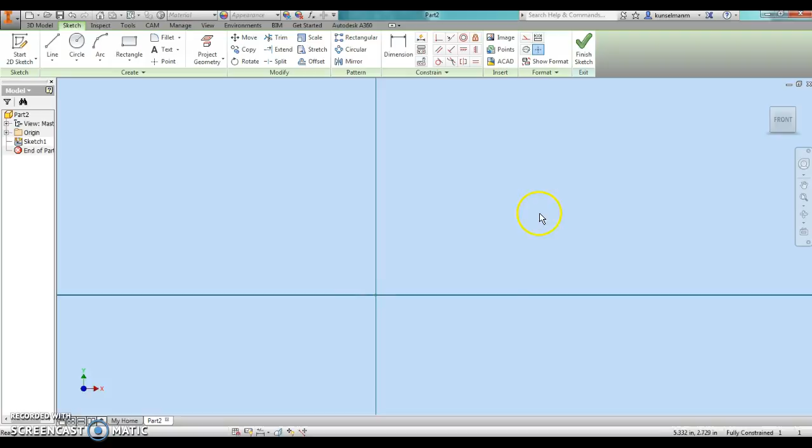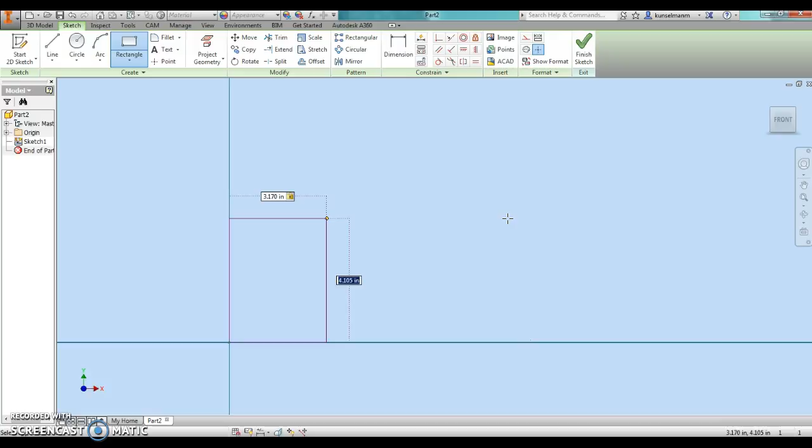Alright, so we're going to start with the passenger section of the Automoblox car. First thing I'm going to do is go to a new sketch, and I'm going to choose a plane. Okay, I'm going to start this by creating a rectangle, 2-point rectangle. I'll start with an anchor at the origin and move my mouse out, get this started in the shape I want. So this rectangle is going to be 3.17 wide and 1.53 tall. Okay, so there's the start of that passenger section.

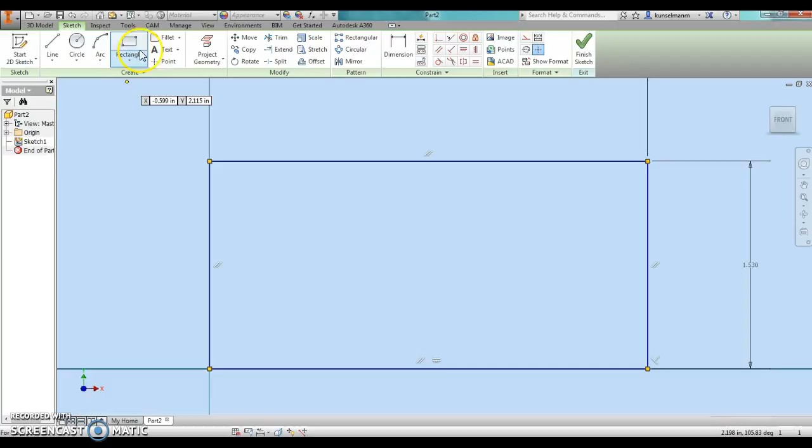I'm going to go ahead and add 2D fillets on this just to extrude it that much faster. We're always trying to get as few parts and as few sketches and extrusions over in our project browser as possible. So I'm going to click fillet, and this fillet on the outside has a radius of 0.3. So I'm going to click this line and that line, this line and that line, and all the way around.

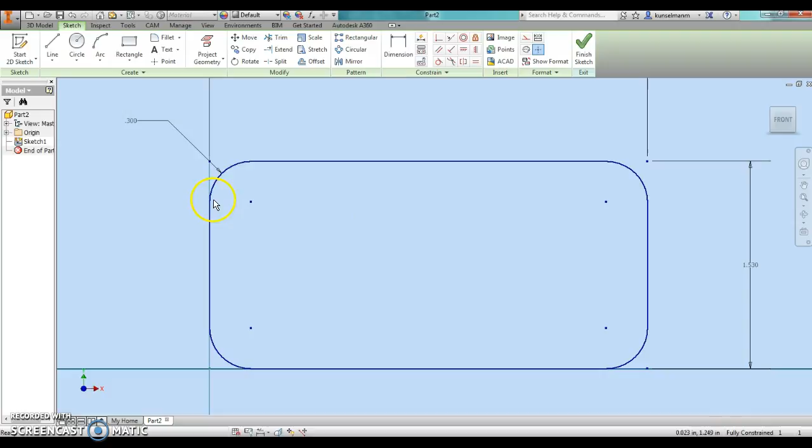Okay? The next thing I'm going to do is add in these little grooves. So little grooves will go along the side. And again, it's just one less step to do it right now. These grooves will start right at the center of those arcs. So I can just go over here, and when I get that snap, I'm going to come over, and these go in 0.06 of an inch, and they're actually 0.06 square. So 0.06, 0.06, and back 0.06.

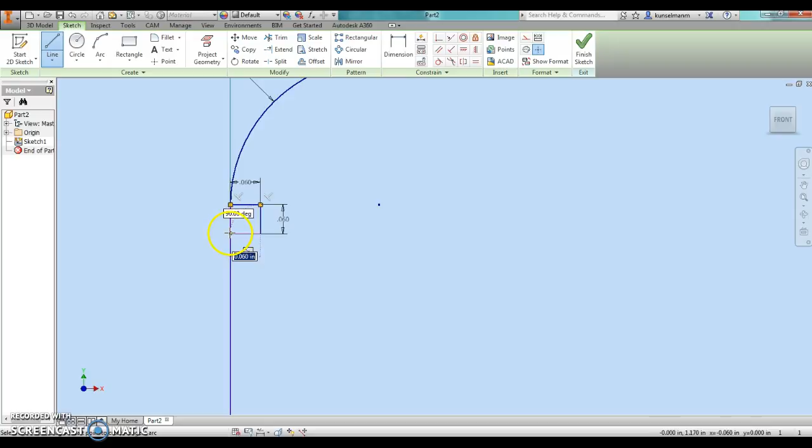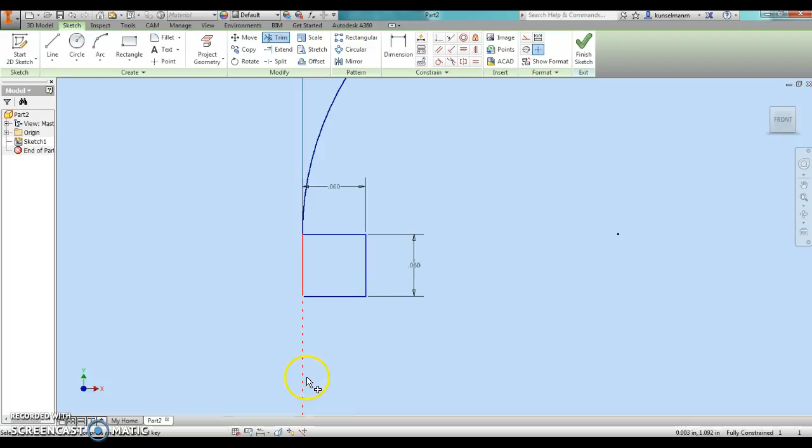Okay, and these are already snapped, but if you were to dimension them or you didn't get them in the right spot, these are actually 0.3 from the top, which you'll see it yells at me because it's already snapped there. Okay, the last thing I need to do is grab this trim tool. So these little scissors, and I'm going to trim that little part there so that I have one continuous line around here. Okay, I go over and do the same thing.

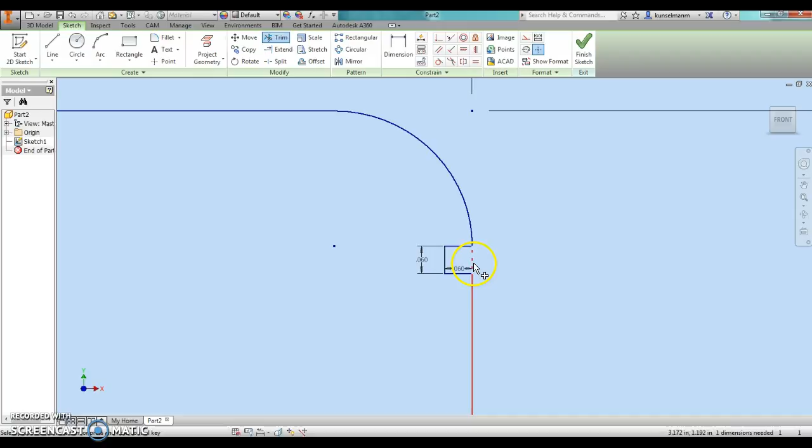Now, yes, I know I could mirror this, but in our class, we have not learned how to mirror yet. That is coming. So again, I'm going to snap this line here. I'm going to come over 0.06, 0.06 down, and 0.06 over. I'm going to grab my trim tool again, trim that.

Okay, now I'm ready to extrude this main part. I'm going to finish my sketch, and I'm going to extrude. Okay, this gets extruded 3.17, 3.17. Okay, the last thing I'm going to do before we move on, I'm just going to make one of these little cutouts in here where the connecting clips go.

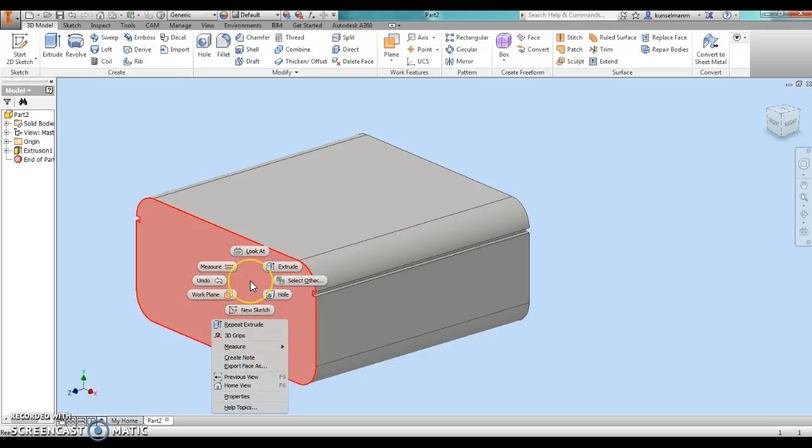Okay, so that is just a new sketch. So right click, new sketch. I'm going to start this off by just drawing a random sized rectangle inside of this. Okay, now I could have dimensioned that, but a lot of this gets pushed and pulled so many ways that I'm going to go through and just dimension it fully. From left side to right side, this dimension, let me drag that out, is I believe 2.5 inches. 2.5, and these are all on your drawings. 2.5, I believe this is 1 inch tall.

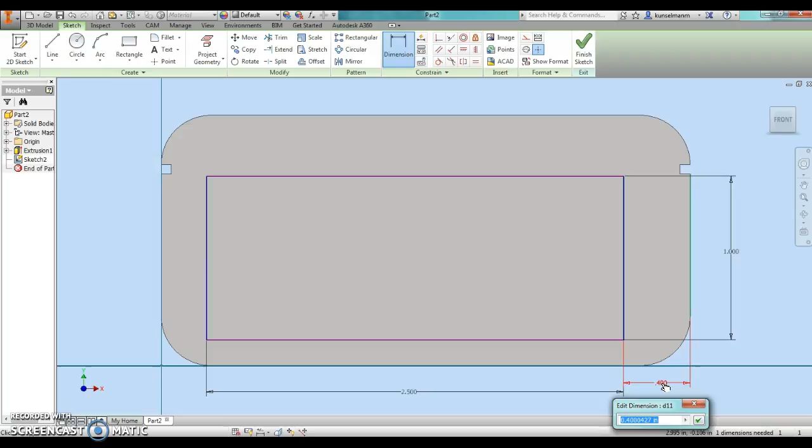Okay, and from the right side, that is 0.39. Actually, that's 0.34. 0.34. Okay, and then from the top, that is 0.27.

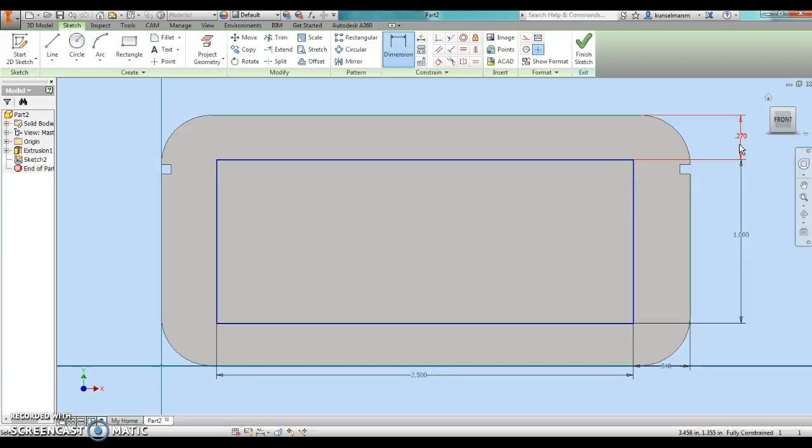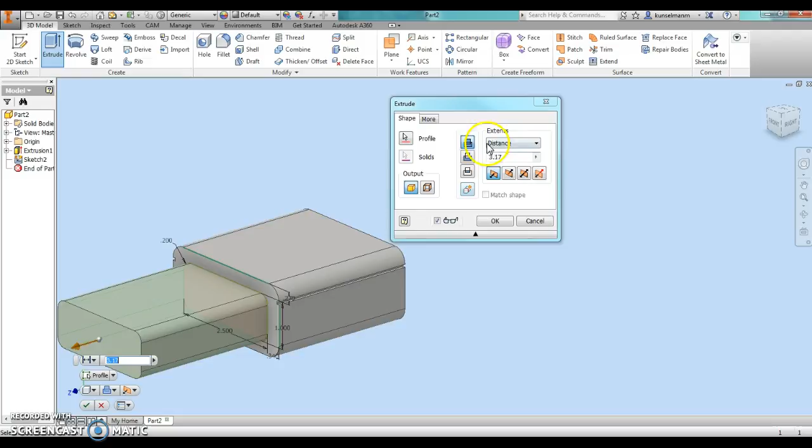Okay, now those all get a fillet as well. The fillets on those internals are 0.2. Click, click, click, click. Almost done, guys. Click, click, click, click. Okay, now when I finish this and extrude that, I'm cutting it in. So instead of joining, I'm going to change this to cut. This gets extruded in 0.57.

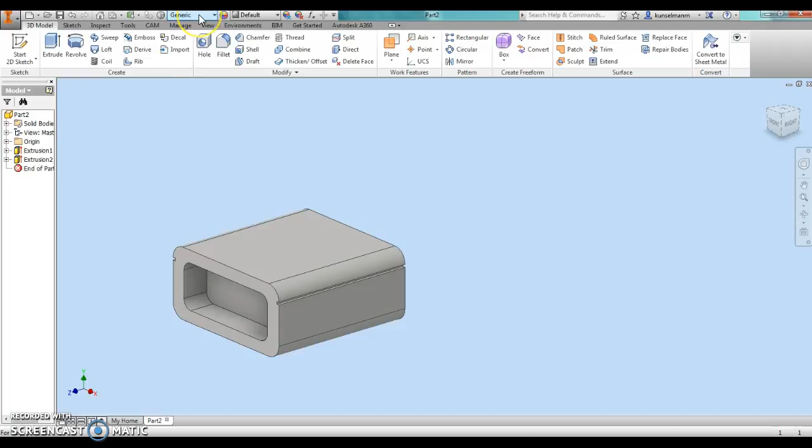Now if you look, that passenger section has two of these cutouts. Some of the dimensions are a little bit different. You need to make sure you're doing it on the right side. And before I save this, I'm going to just change it over to wood. Okay? That's it.